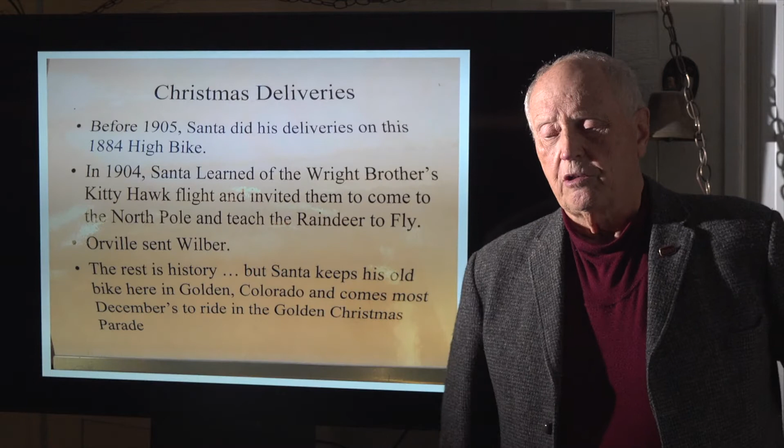First, here's Santa Claus. It's the season of Santa Claus, and he used to deliver his presents on that bike up until 1905. In 1904, he learned about the Wright brothers' flight at Kitty Hawk, and he wrote a letter and said, 'Hey, come up and teach my reindeer how to fly.' And so Orville sent Wilbur.

And there's the bike. Now what you don't see is he's got a sign on his chest: 'Please save my workshop floor from melting. It was 20 foot deep, thick, and now it's only 10 foot thick. My elves and all my tooling investments are at risk. Thank you, Santa Claus.' You notice there's a little bit of chauvinism in there. He didn't say anything about saving Mrs. Claus, but we got to forgive him. He was a well-intentioned dude.

Okay, so with him put away for the time being, personal climate responsibility. Many people have talked about the relevance of doing rather than just speaking. Nelson Mandela: you can never have an impact on the world if you have not changed yourself. Eleanor Roosevelt: one's philosophy is not best reflected in words, it is best reflected in the choices we make, which are our responsibility. Eldridge Cleaver in the 60s: you have to be part of the solution, else you are part of the problem. Mohandas Gandhi, also known as Mahatma Gandhi: be the change you wish to see in the world.

Paul Hawken, I really love this: do what needs to be done, don't stop to see if it's impossible until you're done. And then I like to say, there's no greater civil right than a right to a livable planet. And in the words of a poem by David Whyte, start close in. Do not do the second step, the third step, start with the first step. And I say, the first step is stop being the problem.

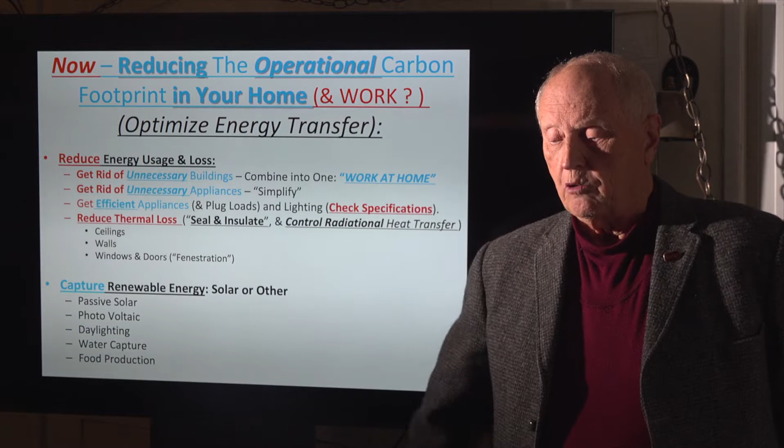Okay, so to reduce the carbon footprint, operational footprint in your home, and I put in parenthetically, and work, you need to reduce the energy loss and usage and capture renewable energy. As far as the first 2 points under the reduce, get rid of unnecessary buildings, whatever that means, and then get rid of unnecessary appliances, simplify, and then reduce thermal loss, then capture. I just want to say most of the talk is going to be on reducing the thermal loss with sealing and insulating and controlling radiational heat transfer in and out of the house.

So unnecessary buildings. I have a museum in my house, so my work is at home. And it's a gallery as well as a museum. Lots of funny old bikes, lots of funny old pictures of old bikes. I also, for appliances, got rid of the gas clothes dryer by having in this added space a passive solar walk-in clothes dryer. Now, there are tiers of energy activity.

Last week, you learned to calculate your carbon footprint. That's tier 0. Calculating didn't do anything to cut your carbon footprint. Tier 0.5, still not doing anything, is an energy audit. There are a lot of people that'll do an energy audit. Some of them will do a real good job and you'll learn a lot from them.

Some just go through the forms. Make sure you get a competent energy auditor and that they explain what they came up with.

There's tier 1, 2, and 3. Tier 1 is easy, you can do it yourself or contract it as a standard thing. So changing your light bulbs to LEDs if you haven't yet. Attic, seal and insulate - last week in the questions, the first question you gave me was what is the most important thing to do to a house, and I said attic. Next is lighter roof color, whenever you're going to do a new roof anyway because of hail. Most of us get our roofs done because of hail.

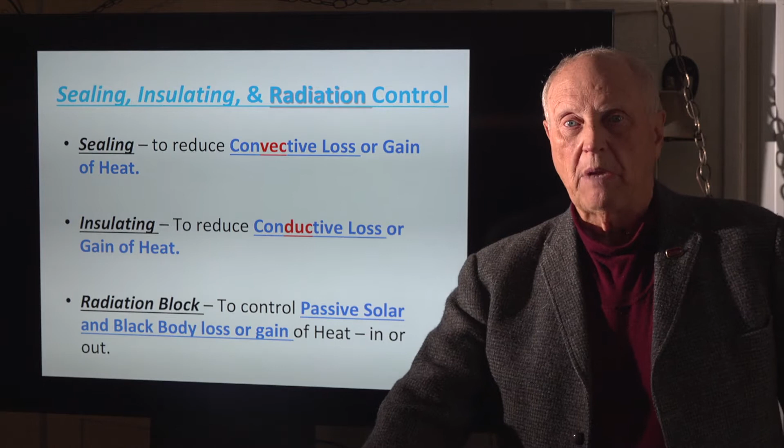And then the most aggressive is the building footprint, and you can add airlocks and make them just a single airlock to give you a buffer. So again, those are the easy ones - sealing, insulating, and radiation control. Sealing is to reduce convective loss. Insulating is to reduce conductive loss. And radiation block is to control the solar heat gain and black body loss of heat. Your body radiates out a window at a different frequency than the sun comes in. So there's coatings on the glass that can make it be a one-way stop or the other way or both.

Now, insulating values of materials per inch - this is for conduction. The red ones are typical wall and ceiling fills. Notice that poured concrete takes 12 inches to be R1. By the way, snow is R1 in 1 inch - wow, 12 inches of concrete equals snow. Wood chips is 1. Now aerated concrete is 1, where poured concrete takes 12 inches, this is only 1 inch.

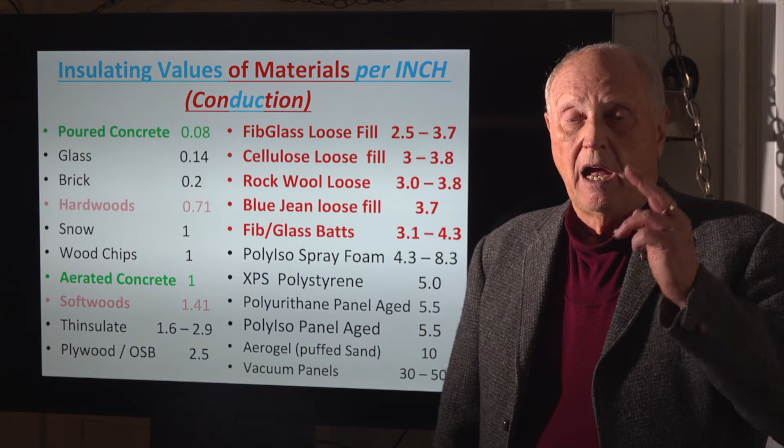Putting air in stops the conductive heat transfer. Another thing to notice, most of the framing is softwoods - notice it's 1.4 per inch, whereas hardwoods are 0.7. So a fir or redwood or pine is twice as insulating as hardwood. That's why framing is softwoods plus - softwoods are cheaper. It's interesting to note, thinsulate or down in a jacket is variably 1.6 to 2.9.

And then I'll just say all of the various foam panels are in the 4 to 7 range, up to 8. Aerogel, which is puffed silica or puffed sand, you can get 10, but it's hard to control and contain - it wants to go all over. And then vacuum panels - these are not used hardly at all. In Germany, they made some 12, 15 years ago, and they're fantastic, but they're not cheap. And as soon as you try to nail a picture up on the wall, no vacuum, and then they're back with poured concrete.

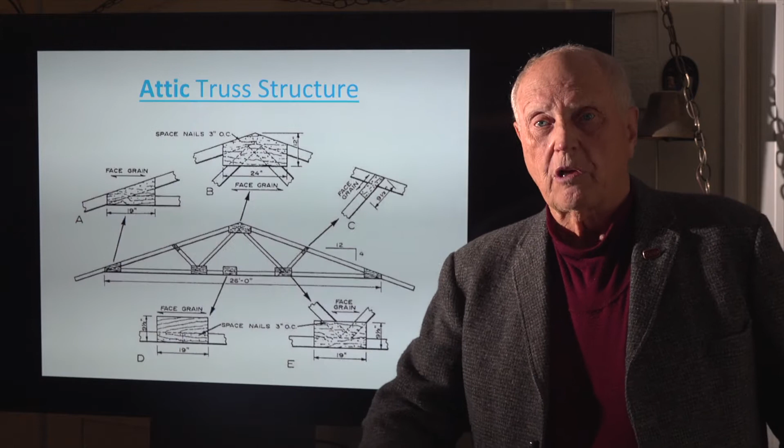Okay, attics and ceilings - this is the first thing you talked about, asking me a question last time. Here's a typical truss structure, very typical. There's other roof structures.

And infrared cameras. This one is a high quality one - this goes onto your cell phone, and this just gives you 1 pixel, just like when the nurse takes a temperature on your forehead. But the 1 pixel, if you move it around, it gives you a constructed mental picture.

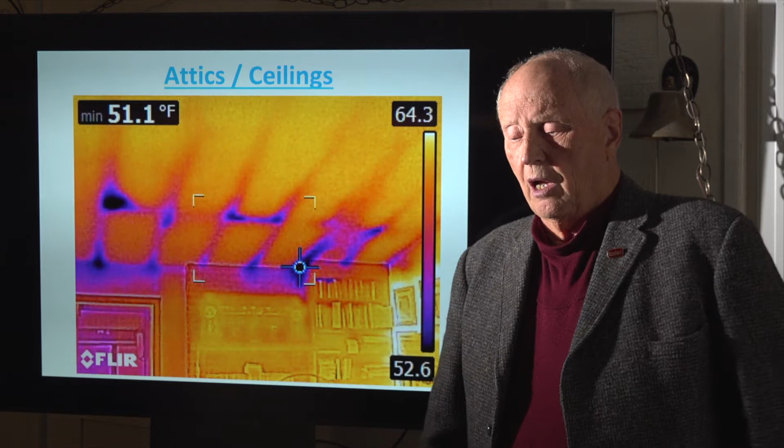Now, this is a ceiling, and you can see right along the top plate of the wall, and then where the truss supports come up, a lot of cold is coming down on a winter's day. And you go up in the attic and you crawl around and you blow stuff in. And this finished job is as high as shoulder length there, and so it's about R100, except over at the very edges.

But before you add insulation to an attic, you stop - which is for conductive losses - you stop and seal all the seams to stop convective loss, that's leaks. So you seal every place that the wallboard's coming up a wall and the wallboard's on the ceiling, you see the wooden top plate. You seal all of those with a foam - that's a 40-year or longer lasting foam.

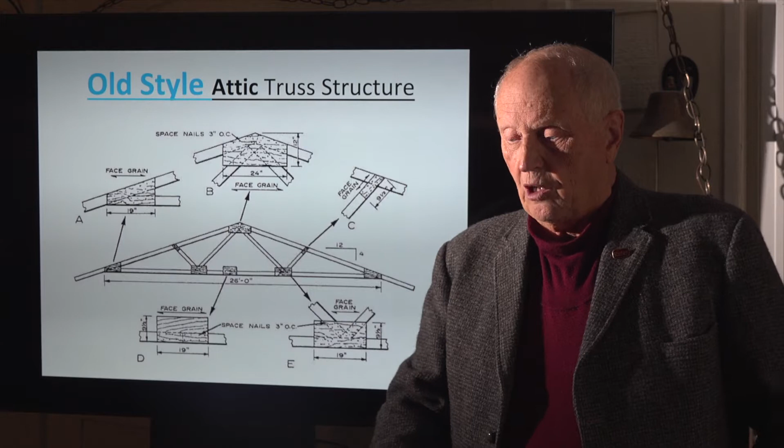So this is an old style truss, but there are new style trusses. What you notice here is a lot more at the edge and longer runs for heat to sneak out. You'll still get a little difference in your infrared, but it'll be much better.

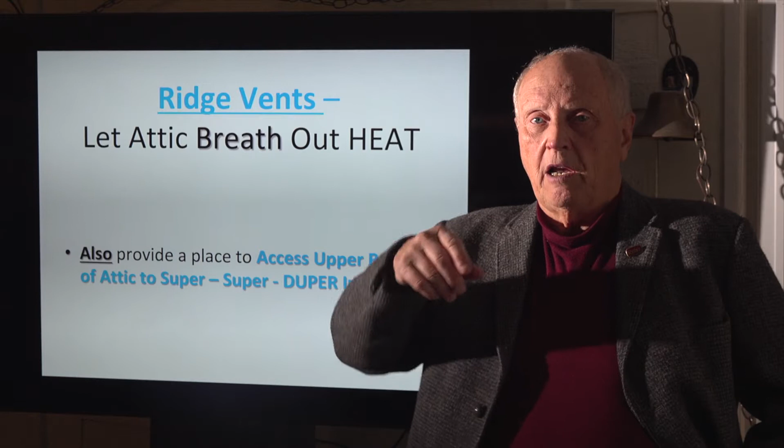Now, the ridge, the very top of your attic, lets the attic breathe out if you have vents up there. There's lots of ways of venting an attic, but if you let it go out from the sun at the tippy top, you get the best flow. And it provides room for somebody like Adam here from Bestway.

You can go beyond R100 and you can get it all the way filled up.

Now we're going to talk about walls. What are walls? Well, parts of the building perimeter or building envelope that have holes. Some standard holes and some non-standard holes. So doors, windows, and vents for ventilation are standard holes. Non-standard are electrical outlets, unless you go around and seal behind the plug, and cracks here and there, and gaps between doors and frames, and between windows and frames.

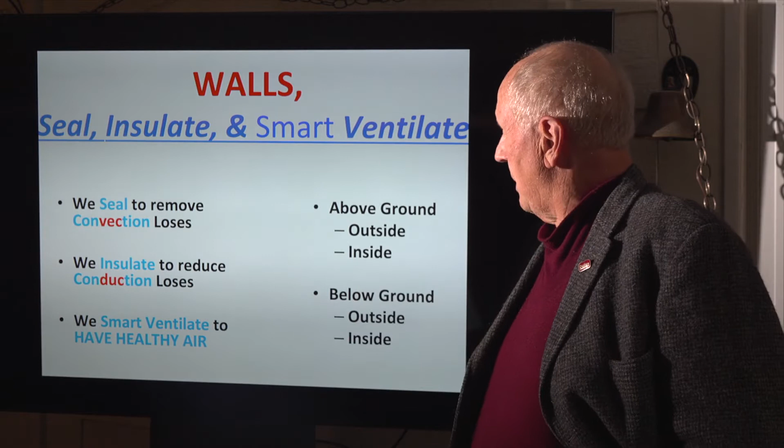So we want to seal, we want to insulate, and we want to smart ventilate. Opening a window ventilates, but we want to do it better than that because you lose the heat you put in, or the cool in the summer that you've put in. We want to do it above ground, outside and inside, below ground, outside and or inside, on each of these.

So house envelope walls can be frame, masonry, a structurally insulated panel - SIP panel, which are kind of nice and more expensive - or it can be a hybrid of frame with rigid insulation panels, or a hybrid of brick with rigid insulation panels. And the insulating values apply for the walls just like the ceilings.

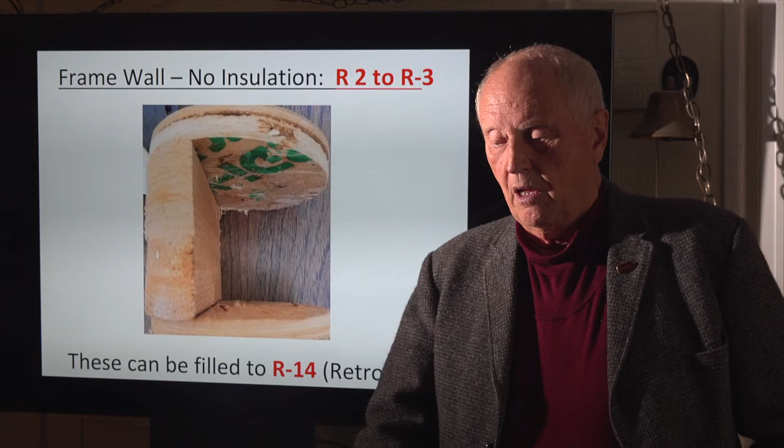Same thing. So let's take a core section of a wall, and you get this core sample. If there's no insulation, it's going to be R2 to R3. That's a low R value.

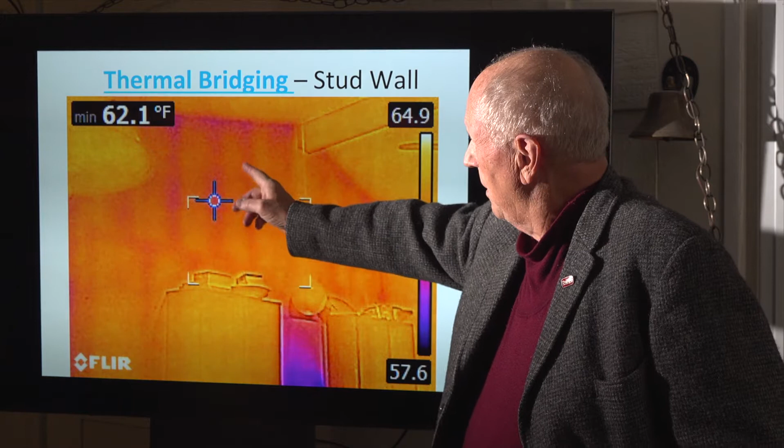If you have a fiberglass batt properly installed, it's R9 in a 2x4 wall. If you then tube fill with cellulose and press it in by doing a hole outside, you can get up to R14, so you can buy R5 addition. Now, you see on a wall the thermal bridging of where the 2x4s are - that's colder, that's warmer than that is.

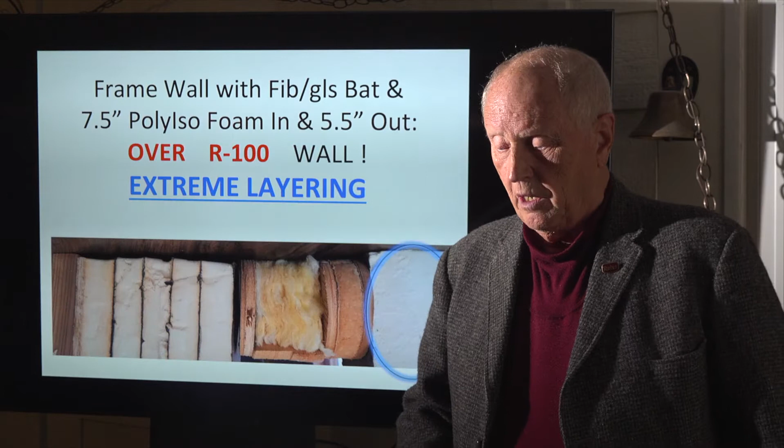And you can wrap with insulation, like this, which is polyiso. You can add more layers of that, and then put a layer that has a screw surface, and put your finish on that. And when you put your finish on, well, you can do it inside and outside.

So you can be really obsessive compulsive like I am.

You could also spray. Now, this seals real well. It is done commercially, but it's dangerous to apply, and there have been whole neighborhoods where it was applied, and later there were toxic emissions. So if you're going to go that way, it has to be well planned and well controlled.

Now we're going to look - there's a view from above at the top of my house, and you see the walls that I played with.

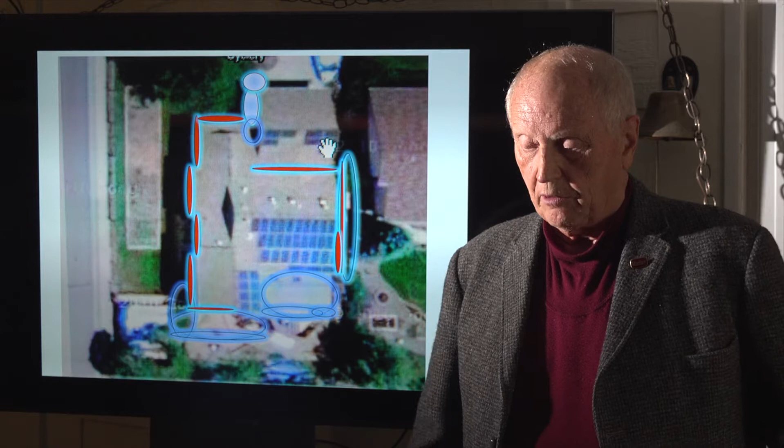And I'm going to take off my jacket because I'm getting warm. Seem to have a habit of doing that.

And we're going to start with the dining room wall on the inside, then we'll do the outside of dining room and kitchen.

So here you see 3 or 4 layers that are 1.5 inch thick of this polyisocyanurate foam, boxing first around with redwood onto the outlet and the heat duct, and then laying this up in layers, and then foaming to seal everything all around everywhere.

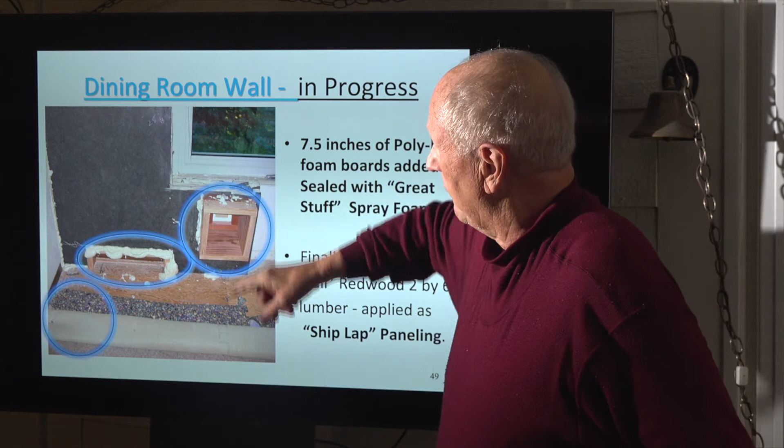And then after you get there's 4 layers of 1.5, then a layer that has the screw surface, and when you're done, right where that wall section and outlet and the heat duct are, you get a redwood wall.

This is redwood decking material that I've routed and made into a shiplap so it smoothly laps. And if you get redwood deck stuff that's cull, C-U-L-L, you get it for either 75 or 80% off at Lowe's, and you can make it be straight.

You can clean it up with a hand planer, you can route the edge, and it's great for a discount because people don't want to put crooked boards down.

And then when you put it up, you screw the bottom, screw the top, attach a block, a wedge, shove it over, and it's straight. It stays straight when you screw it. So this is that wall with the inside, with that much insulation.

Then I did the outside, and we're going to see that happen. Okay, here, that's garage, this is house. Cut right up through there.

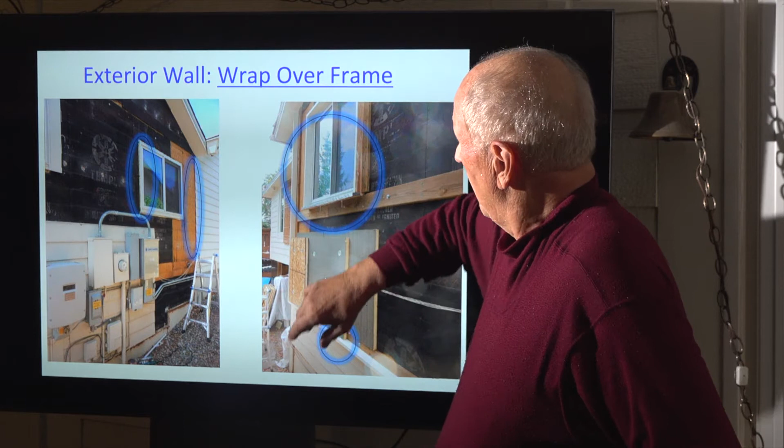I'm not going to cover up, I'm not going to lift all of that. So I cut and then did borders with 2x6 redwood, borders around windows, and then filled in.

And so there's a stack of material, and I happen to get that at a place called Extra Building Materials in Denver on the north side, just outside the city limits. Tax rate's only 5% out there. And this is stuff where the cut was slightly off spec or something, so it's greatly discounted.

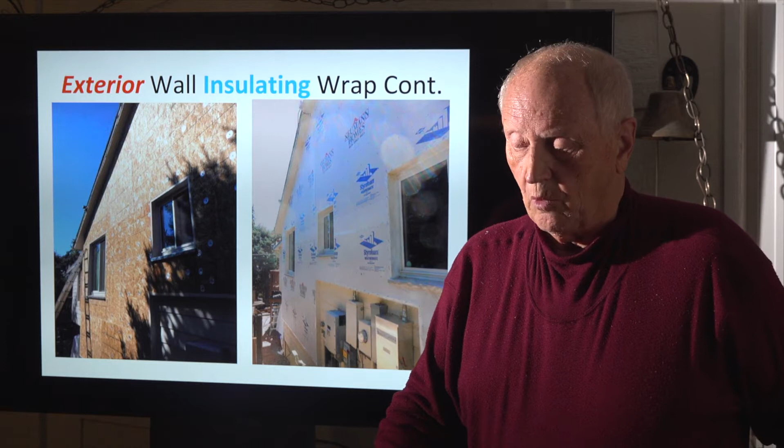And you have some paper tapers, but anyway, you build it all out, and then you put up your Tyvek or whatever material you want as a drain plane and air barrier. Vapor goes through, it's permeable to vapor, but not water.

And then all the siding that was on, I'd taken down, caulked all the holes, painted it 3 times with the top exterior paint, Valspar paint from Lowe's, and put it back up. So it's as good as new, or better than new.

Okay, so we've done that and that. I'm going to show this. Those are similar, but this is between the garage and the kitchen.

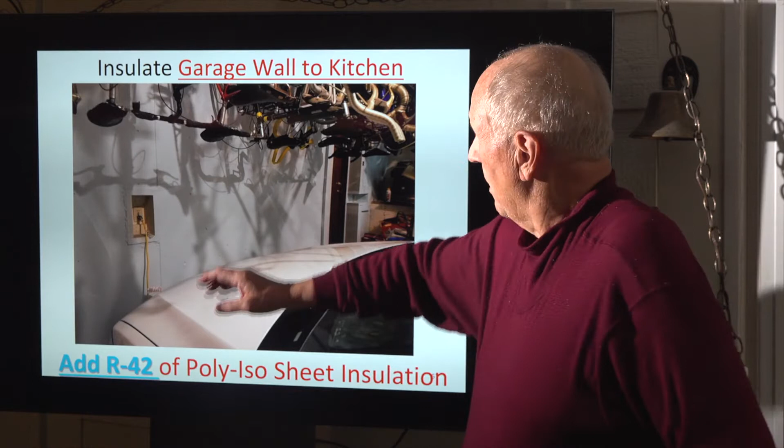Basically, I put up 6 inches of polyiso with 6 inch width of plywood after boxing around the door with 2x8 redwood and around the light switch and the outlet.

Now, the basement. You can do this from the outside and the inside if you have access to the inside. It takes a tarp, a shovel, a spade, and a yardstick. The yardstick's up here. The tarp goes down just so you don't mess up your lawn.

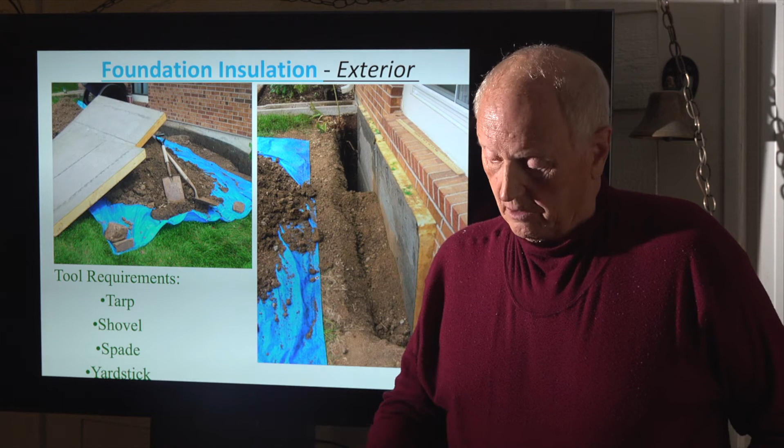And so there's the yardstick, spade. The spade kind of cuts, this kind of lifts, and you dump, and you measure until you're down. I did 4 feet. This is 4 inches thick. 4 inches gives you about R28, added to what was R1 concrete. So that's changing the basement quite a bit.

Now inside, quite often builders have done fiberglass with a plastic barrier. If you did an infrared on this, you'd see every place that the little nails were. It's cold as can be, but this is standard for a builder.

Now, one thing is, at the very top of that wall, there's an area called a rim joist. These are floor joists, and then a rim joist. And at that rim joist, the builder just shoved a little bit of fiberglass in.

And when he shoved the fiberglass in, he didn't really caulk to seal everything first. If there were plumbing lines going out for faucets, or a gas line coming in, or wiring going out to your circuit breaker box, they didn't seal it. So this fiberglass is very porous, and air goes right through it.

And so when you take these out, which are about an R8 or 9, you're going to see outside in a lot of places. So you want to caulk all of that first, and then cut pieces of the same polyiso and fit it in, then foam with Great Stuff around the edge.

I did 1 layer and then another layer, each 3 inches, to get 6 inches. At R7, that's R42, and it's all sealed. Really tightens up a house at the rim joist.

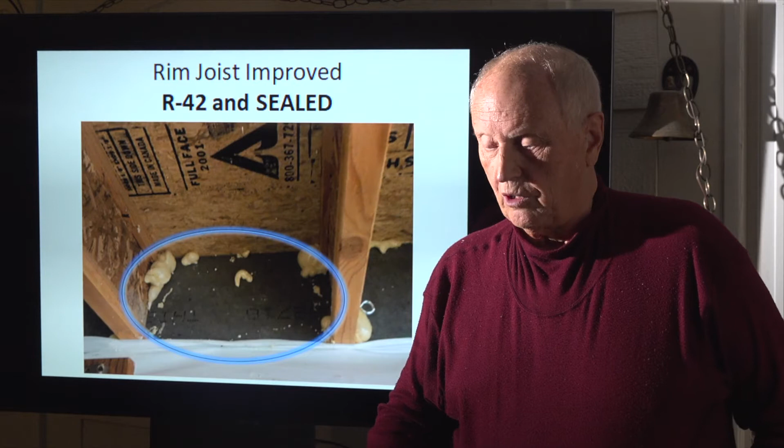Okay, another place it's a little bit of an oddball: wherever you have a bedroom sticking out, the builder probably didn't do anything.

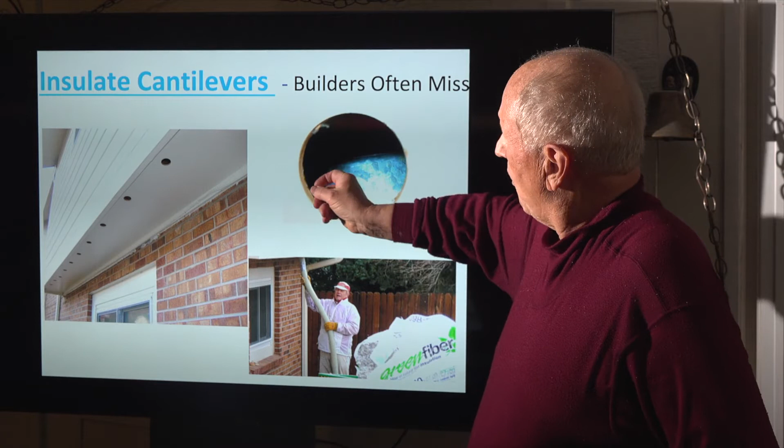So you drill one pilot hole, and the first time I didn't see this, but I saw that there's nothing up there, so I did all of it. This is a heating duct coming to the master bedroom, and it's just 1/4 inch plywood away from a -10-degree night. In other words, you don't get warm air into that bedroom. The furnace warms it up, but as it passes through there, it gets cold. So you blow cellulose in, that's about the easiest thing, and then you put a wood plug. You can get wood plugs that'll plug it up.

Okay, windows. Holes in the house for view, for daylight, for ventilation, and for sanity. I mean, sanity is a good reason. And they can be in walls, ceilings, and in floors. Hey, why not?

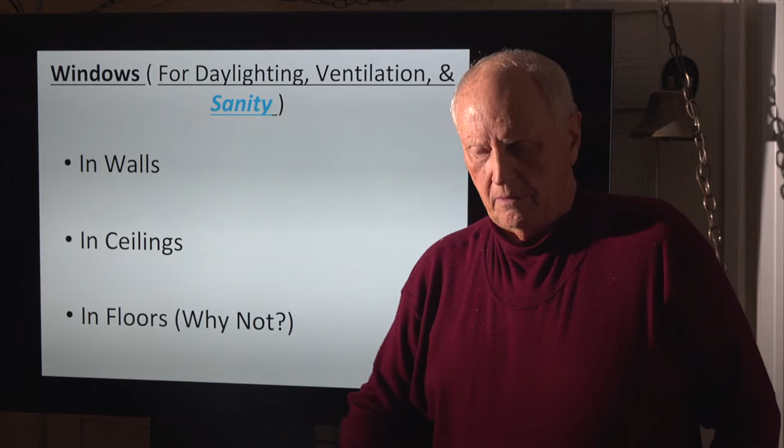So, a multitude of window types. You've got frames, glazing units, coatings on the glass, direction of exposure—whether it's north, south, east, or west makes a difference on how you select your glass—and layered with storm windows potentially.

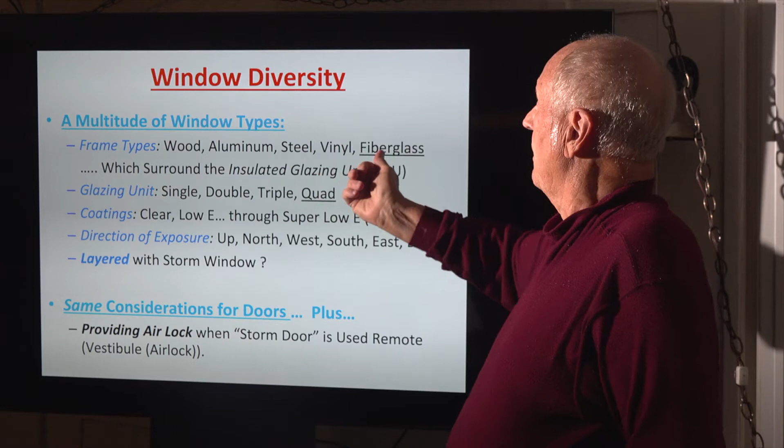So of the frame types, this will rot, these two are cold, that will deform on a hot day, and this does not. It doesn't deform, doesn't rot. It's not terribly cold if its frame is done in a way that has insulation inside.

The other good thing about fiberglass: there's something called the coefficient of linear expansion, and vinyl has a different coefficient of linear expansion than glass. So on a hot day, the glass wants to expand a little bit. The vinyl is different, and that puts forces in that may break the seal in your double or triple or quad glazed window, and then you get a foggy area. Fiberglass is glass, and glass is glass, so the two have the same coefficient of linear expansion, which means you have less problem with that.

Now, insulating value of windows. A single glaze, meaning one piece of glass, the stuff that was in houses in the 60s and 50s and 40s, 1960s and 50s, 1860s, 50s and 40s too, by the way, is about R1. Now what is the R value and U value? They rate windows by U value, which is the reciprocal of R value. So if you take 1 and divide by the U value, you get the R value.

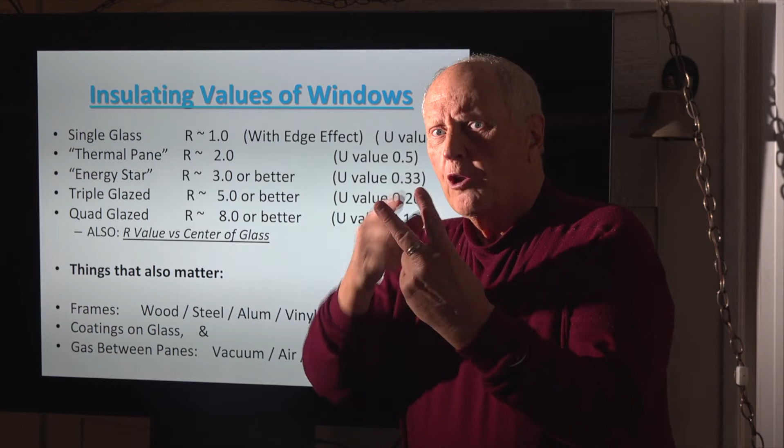So a thermal pane, two layers of glass, no special gases, no coatings, gets you about R2, which is a U value around 0.5. To be Energy Star, it's going to be about R3 or more, or a U value around 0.33 to 0.30. And that gets you Energy Star, which was set by the U.S. government a long, long time ago. Windows have gotten much better. The old ones that have either a coating or argon gas will give you an Energy Star rating. But you can get much better than that. A triple glazed with appropriate fillings will be R5, which is a U value of 0.2. And if you get a quad glaze made right up here in Boulder County in Superior, you can get R8 or better, so U value down to 0.125. This is for the glass unit, not the frame, and the frame is always worse than the glazing unit.

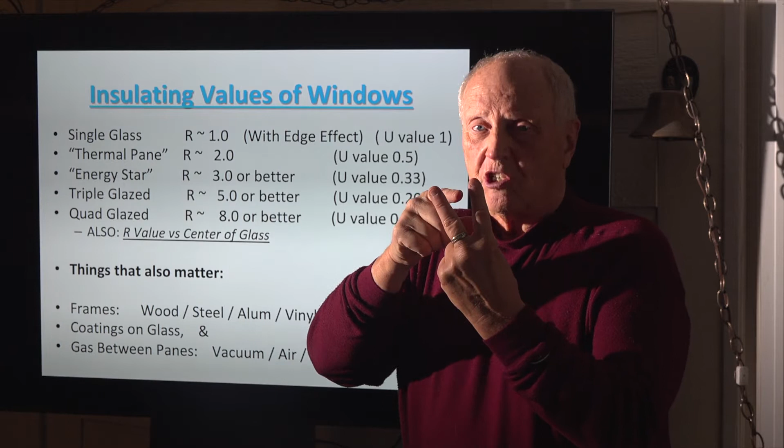Okay, so we talked about those things. Krypton is the best gas. Why is it the best gas? Well, if you have air in there between these two layers, and it's cold on this side and hot on that side, the air will get cold, drop down, then come up with the heat, and go around—so it's transmitting heat between the two layers. Argon is a little bit heavier, so it'll go slower and won't transmit as much. Krypton is still heavier, so it goes slower and doesn't carry that heat around as much.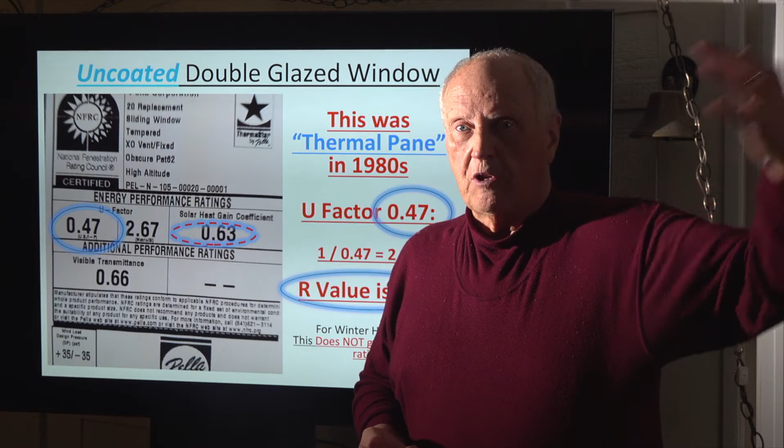It also tells you the solar heat gain coefficient, which is different. The U value is heat you're going to lose going out, and the solar heat gain factor is heat you're going to gain from the sun. Depending on what coatings you put on the glass, you can block the spectrum of one and let the other through, or block the spectrum of the other and let the one through. Then there's visual transmittance—did it dim the view? 0.66 is a good view, it's not dimmed very much. But this is the thermal pane of the 1980s.

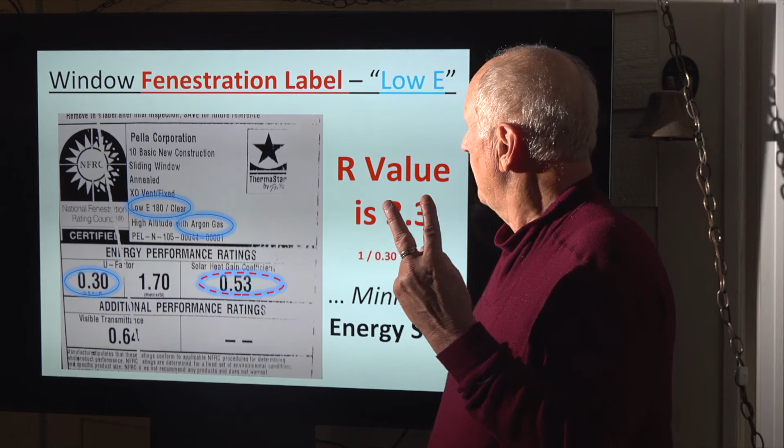Now this is Energy Star. What have they done? They've gotten one coating of E180 on one of the pieces of glass, and they have argon gas. That gets them down to a 0.30. That is minimally Energy Star. And the solar heat gain is a little bit down from a 0.6.

We're going to just see. Now this, 0.27, so we're up to an R of 3.7. And this also cut the solar heat gain a lot. So this is not what you want on a south side, where you want passive gain on a passive house.

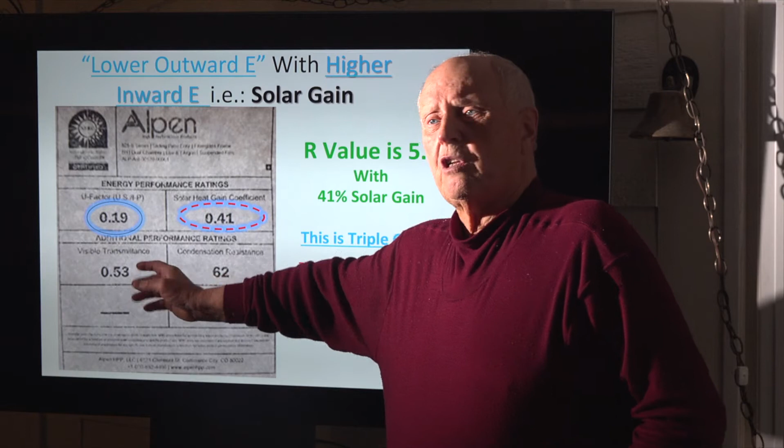But it's reasonably good for what you lose. Now this, we're down, hey, this is R5, 5.3. And this still gives you 0.41. This is great on a passive solar house, where you want to get the sun in the winter but not lose it in the winter. And it still gives you good visibility that doesn't look very darkened. They also sometimes throw in a condensation factor, how much you'll get around the edges from cold.

Now, I talked about windows having frames and then the glazing unit. This is from Alpen, right up in Superior, and it's got, this is the center of glass performance, a U-factor of 0.08. That says, for all except the 2-inch side edges of the glass, it's an R12.5. Wow, that's better than the houses of the 80s, 90s, even with fiberglass batt insulation and a wood frame wall.

And it has a solar heat gain of 0.46. This is fantastic if you want to get that low sun in the winter coming in, and you don't want the heat going out, the spectrum of black body. You don't want to get near it and feel how cold it's just sucking out of you.

Now, Alpen has their most recent low thing. They get down to 0.1 for the whole window, including the frame. And they also make it a little bit dark, so you're down to 0.3 on the vis.

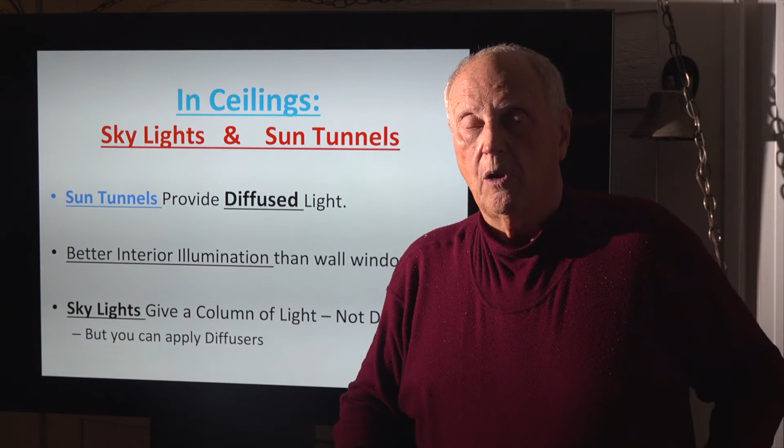Okay, windows can be in walls, they can be in ceilings - we call it a sun tunnel or skylight. Sun tunnels have diffusers that spread the light, which is far more effective than just a column of light like a skylight. This shows that a sun tunnel, even though it's triple glazed, is a little bit colder, but not terrible - everything's relative here. It's getting about 58 or 59 degrees when the room's at about 64 to 65. So it is cooler, but it gives you far more light than a window on the wall.

Now this is a window in the floor. In my house, one of the additions has a gymnasium, and below it is the greenhouse. I'm trying to bounce light into the back from the gymnasium, which is also catching a lot of light, so I have a window in the floor. You see a fan that goes around down there, actually blocking the banana tree, but the aloe vera is around the side. Okay, now doors for energy loss.

You can have conduction, just like a window, convection through leaks and gaskets and worn weather stripping, convection around the door frame from bad installation, and if you just leave it open, you have convection. And if it's got a pane of glass in it, you can have radiation going in or out, either solar or black body, giving you or taking away heat. So an airlock entry is better than storm doors because it tightens up the home - you close one door and then open the next. I talked about these a little bit before, and they give you spaces that are 3-season. We're in an airlock on my house right now, and this is December, and it's snowing a little bit outside.

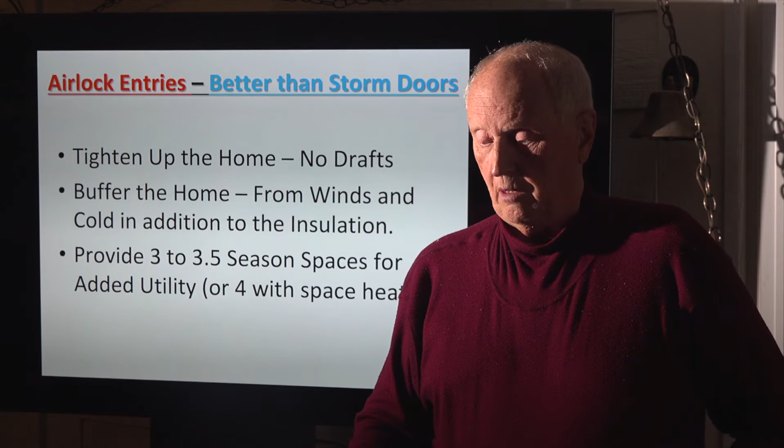Now, airlocks in corporate buildings - here you see the outer wall and the inner. You go through a lot of these things in the day if you're out and about. On a COVID day, you may not.

Okay, so my front airlock - I had a storm door and a portico. Well, I built up with polyiso, put on a door, and put bamboo on there, and got rid of that. That really warmed up the north side of my house. This is the front door on the north side of my house. It didn't make it quite as warm as I'd like it, so I still lost some heat out of 2 layers of doors in a 5x5 room.

So, hey, if 1 is good, 2 is better. So I made another outer front airlock and vestibule, and this looks like that. Some neighbors object, but most think it's not a bad idea. And so that's here.

So now we're going to do a little walk from the south. Right here is the living room. This is the conference room we're in right now, and this is the airlock.

We're going to go out and do a thermal scan, looking at the conference room. Actually, let me go back. This is looking at the original outside door. So it's 71 in the dining room and living room, and the door has its cool spots.

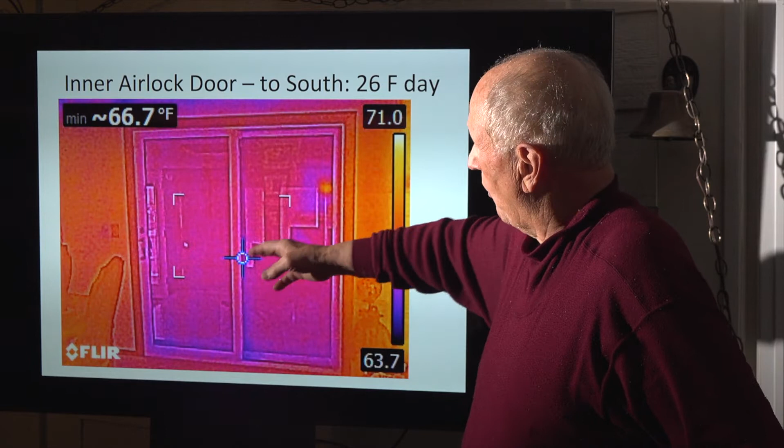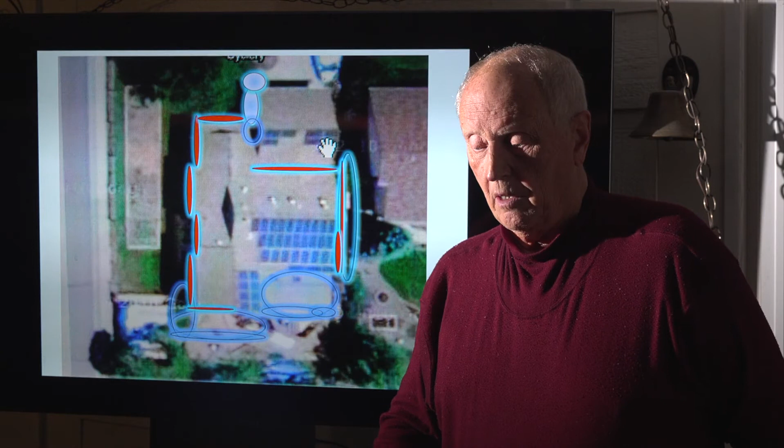So now we're going to talk about appliances and heating, ventilation, and air conditioning. There's a lot of topics here we'll go through. So refrigeration is the first one, and that fits under food preservation.

Historically they did drying, salting, pickling, smoking, curing, and then root cellars and ice boxes. When I was a kid we actually had a wooden box, insulated, and the iceman came and put a block of ice in -- that was an ice box. Then we got sophisticated and got a refrigerator, and then there's freezers.

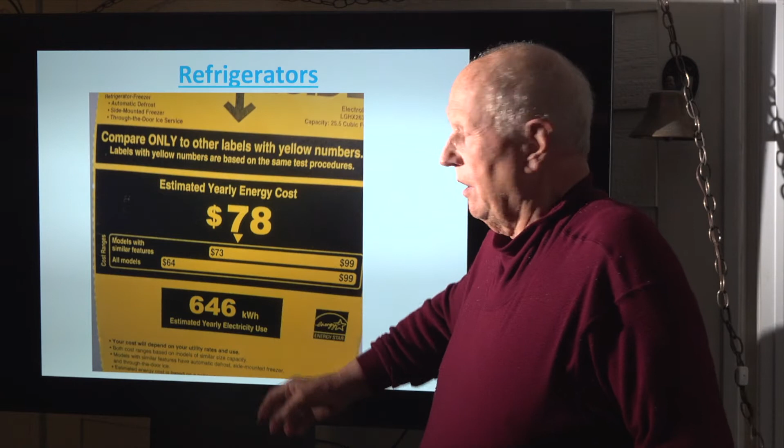On refrigerators, if you're buying one, study the specifications. This says this 25.5 cubic foot refrigerator freezer with water through the door has a cost of $73 to $99, and it'll use that much energy. There's lots of variations on refrigerators, but you want to be kind of low.

I did not buy this. This was at the store. I was just running around Lowe's taking pictures.

So refrigerators are heat pumps. What do they do? They move energy out of the box, and they use less energy moving it out than they moved, so they're productive in getting it out of the box. There are other heat pumps -- some that go one way, and some that can move it out or move it in.

Now, clothes dryers, historic evolution: a hot rock, a branch, a bush beside the stream, over furniture inside the home, or inside a car on a sunny day, or a gas clothes dryer.

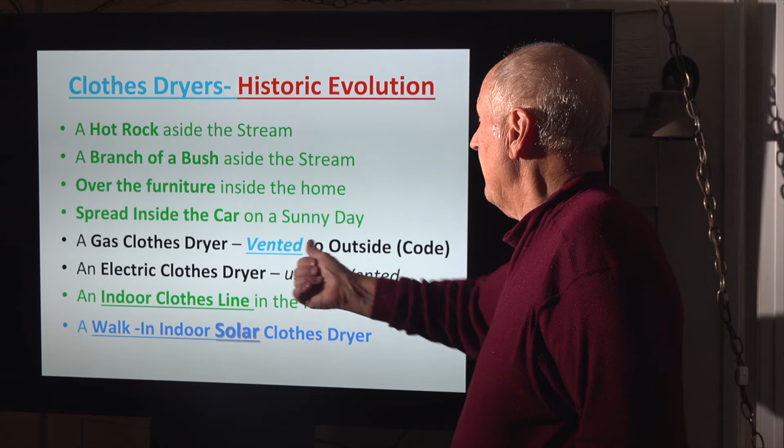Now, a gas clothes dryer puts CO2 in the air, and it has to be vented to the outside, because if it wasn't vented, the CO2 would go into the house and you'd get a CO2 buildup. You'd also get a CO buildup, because there's a little bit of byproduct that's carbon monoxide. Whereas an electric clothes dryer doesn't need to be vented, but it usually is. The gas clothes dryer, by code, has to be vented.

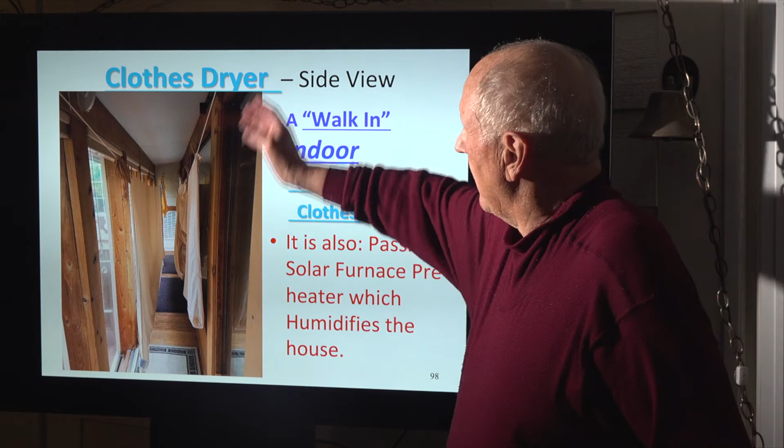And then there's an indoor clothesline in the kitchen, or an outdoor clothesline in the summer, or a walk-in solar clothes dryer -- and that's what I have here, basically two 20-foot clotheslines just between this conference room and the outside to the south. Quad glass and then double glass, and it's down the middle, and it looks like that with some sheets on it. So that gets rid of a gas clothes dryer, which I used to have.

Okay, water heating options. Lots of categories: you have an electric tank, a heat pump water heater, electric added to solar thermal -- these two are solar. Problem with solar thermal, you need backup, and the backup can be the heat pump, or it can be electric. So you have to pay for two systems, and the initial capital cost is high on those.

The bottom line: here's gas at the bare minimum inefficient one at 60%, or natural gas at 80%. And then this is the instant heat. The problem with those, they're expensive, and you get a potential demand charge because they're peaky, depending on how things are structured.

So of all of these, the heat pump is the cheapest on a monthly dollar basis. And it does not -- if you have solar on your roof -- have a carbon footprint. So there it is.

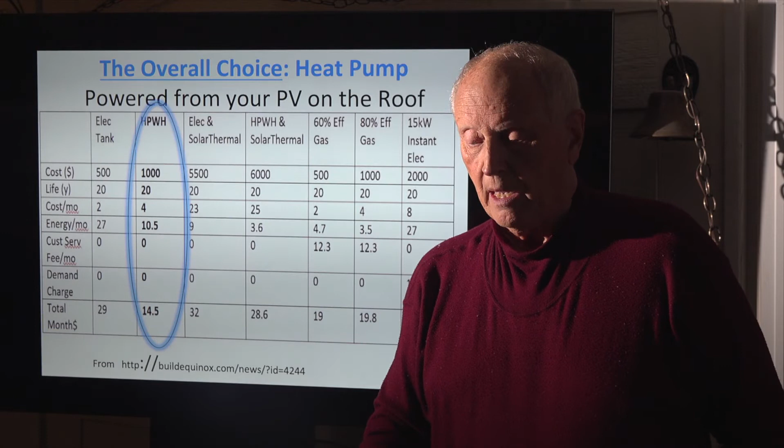Here's what it looks like, and notice the estimated yearly cost: 114. Now let's compare that -- propane, 630; electric, 555; a Rinnai, 175, unless you get hit by the demand charge, and then it goes dramatic.

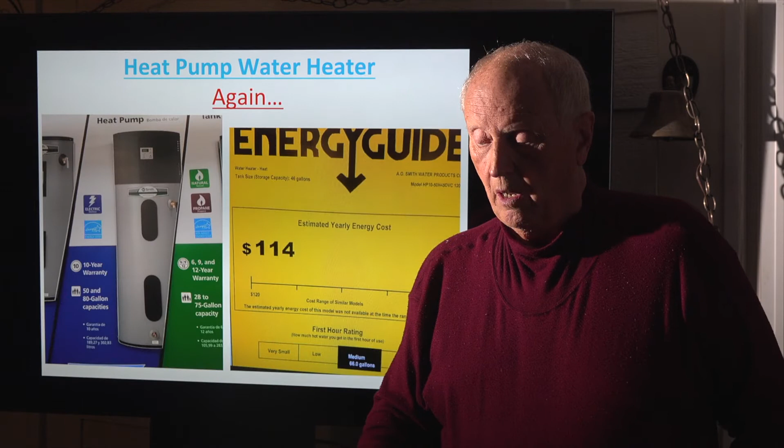And then a small gas, not a 50 or 80 gallon, but a 35 gallon. And then a full-size gas is 244, and that's a good one. So we come back again: the heat pump water heater is cheap in operation and therefore in carbon footprint. Cooking.

Okay, a lot of historic stuff. With a gas stove and oven, you get CO2 emissions and a little bit of CO emissions from the combustion. An electric stove top also produces CO2 emissions, but not inside the house - they're at the power plant when they're generating the power. An induction electric stove top and convection oven, if you have solar panels, produces no emissions.

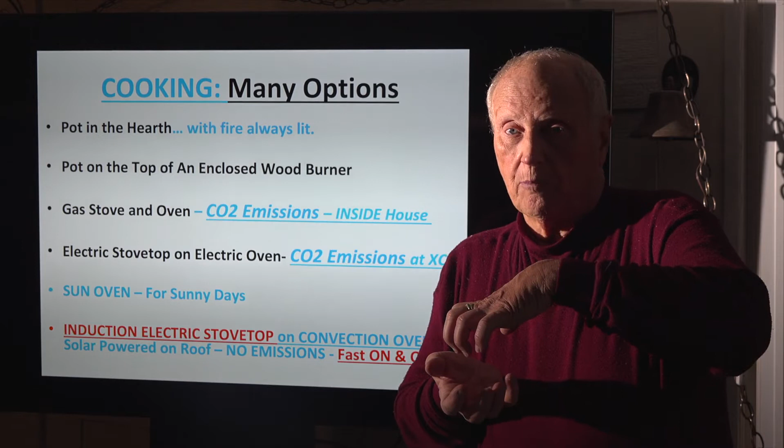A lot of people say they don't want electric stoves, but induction is faster on and off, which gets rid of the dislike of electric. When you turn this off, it's off. It's inducing a current and heat from the element below to the ferrous pan. It has to be iron - you can't use aluminum. So it's real good with iron pots, steel pots. You test your pots with a magnet - keep a magnet right on the side of the refrigerator, and if you have a pan, you go, oh yep, that'll work.

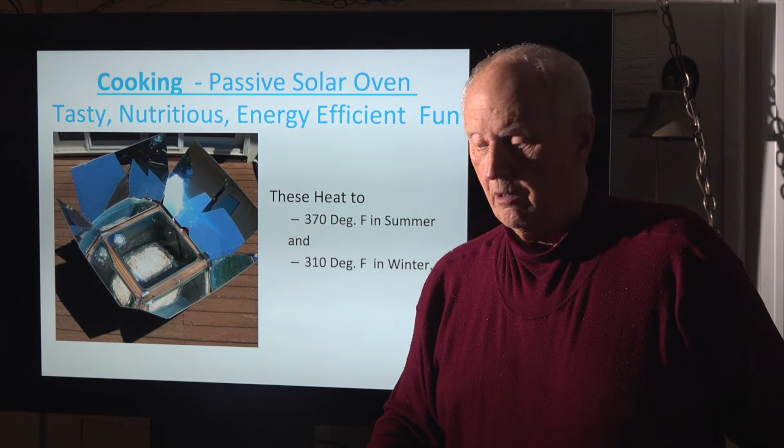Okay, sun oven - this works good on a sunny day, and it gives you a nice thing to be sitting on the driveway while people wonder what the heck you're doing. A sun stove is a little bit different - it's heating the bottom instead of an oven heating the surrounds, it's right on the bottom.

Okay, space heating - the historic view. Ancient is the sun or fire in the teepee, igloo, or mud hut. Now in Greece, in Rome, and in Navajo country, they had solar access laws - thou shalt not shade thy neighbor. We are not so civilized as those people, and so there's been efforts to get that kind of civilization back. Now farms had woodlots for fireplaces, coal furnaces and chimney sweeps, and then fuel oil and natural gas. And then we got fully carbonized, as are our skies.

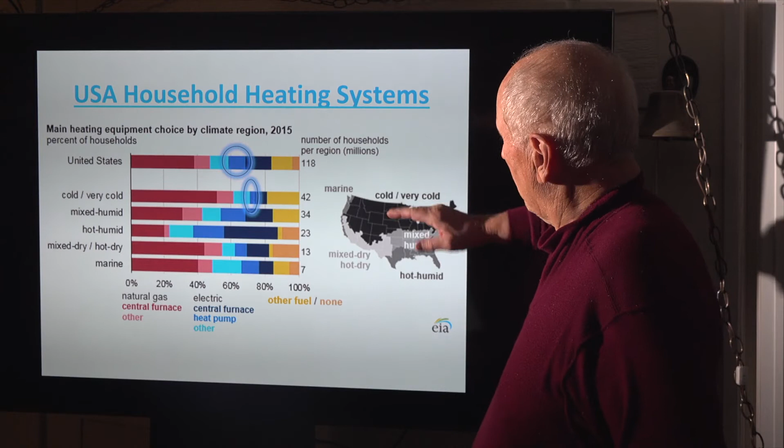In the U.S., if you look at cold, very cold, mixed humid, hot humid, mixed dry, and marine climates, mini splits are a very small part of most of these - especially in the cold, very cold regions. But they didn't used to be highly efficient. Now they're highly efficient, so with a well-insulated house you can use a mini split. What that is, is a refrigerator that'll run forward and backwards, and the box is your house.

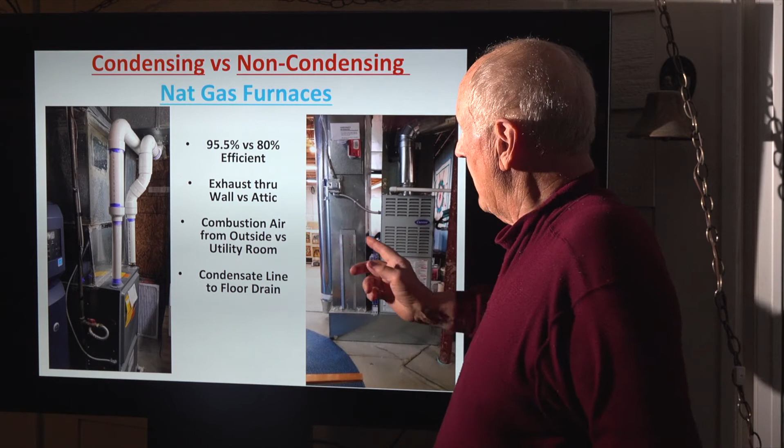So we don't have much in Colorado right now, but people are going that way because they are getting very, very efficient. Now this is a house up on Lookout Mountain - it's got 2 wood burners, and then this is 2 condensing and non-condensing furnaces. So these are about 80%, and these are 95 to 98 percent.

So you've got an outside unit, inside unit, and thermostat. So why heat pumps? Because they are moving heat, not creating heat. They are much more efficient than gas furnaces.

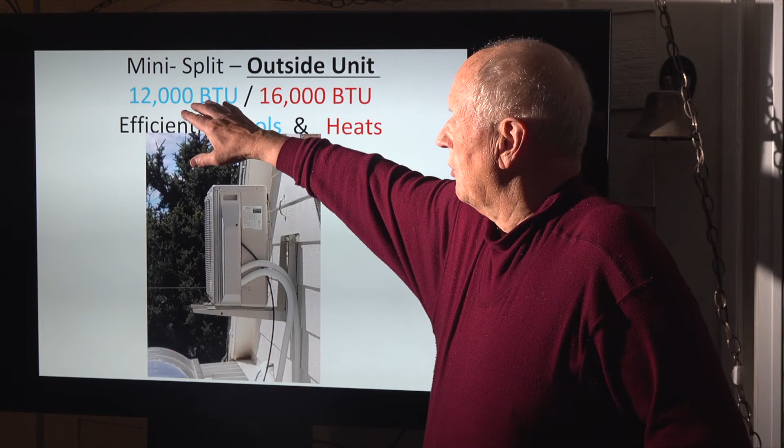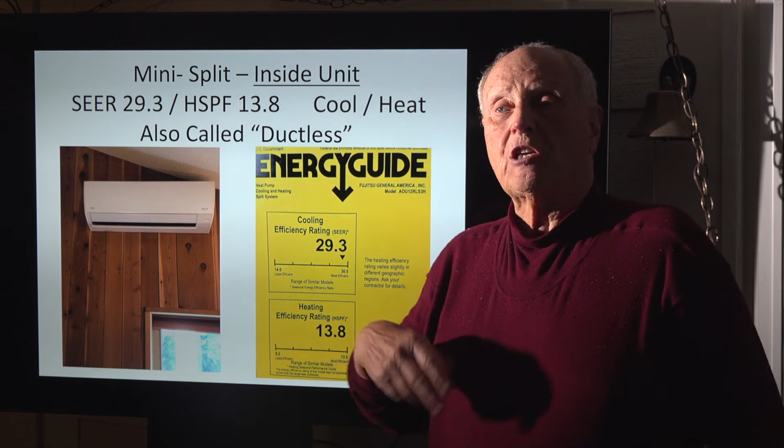So the outside unit - this is one that has a 1 ton or 12,000 BTU rating on the cooling, and a 16,000 BTU or 1 1/3 ton rating on the heating. And that's pretty good - here's its label. Of the range at the time that the energy guides were put together, 14 to 30.5, it's 29.3, so it's right at the top. And on the heating, the HSPF from 8.2 to 13.5 is there. So it exceeded the standard rating when it was done.

Now to do my basement, I decided I'd put another one right next to it, and they got better in the meantime. So that's a Carrier, and notice on a 14 to 30 rating, this is a 42. A 42 means it uses 1/3 as much electricity on cooling as some mini splits.

So you don't just go out and say, I want to buy a mini split. You say, I want to get one with a SEER value of 42. This is the only one, but it's new and it's good. And on heating, out of a top of 13, it's 15, so it's off the top on both. So here you're getting almost twice the heating value.

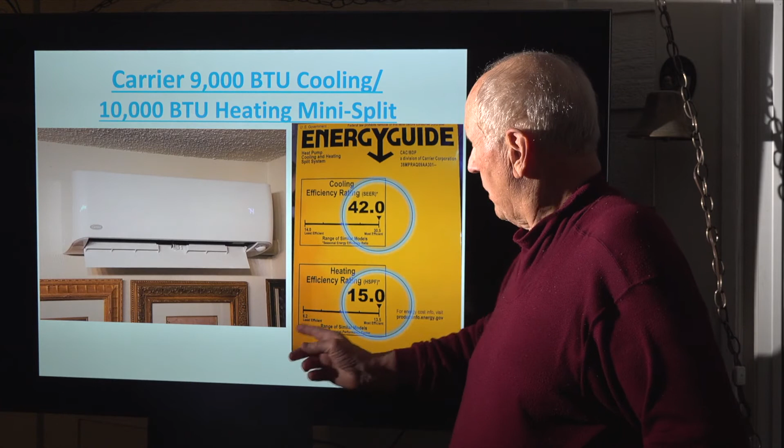It'll take and pull heat out of outside air that's at minus 22 degrees. It'll pull heat out productively and put that heat in, because it's moving heat in - just like a refrigerator is moving heat out, this heat pump is moving it in, unless you turn it around in summer, and then it's moving heat out.

Specs matter. I just want to emphasize, specs matter. If you just go out and buy something, it can be 3 times less efficient. So you really want to check the specs. The price of these is not enough more to matter when you consider the installation cost, because that dominates the price. So if you cut on price, that little bit of savings, you lose a lot.

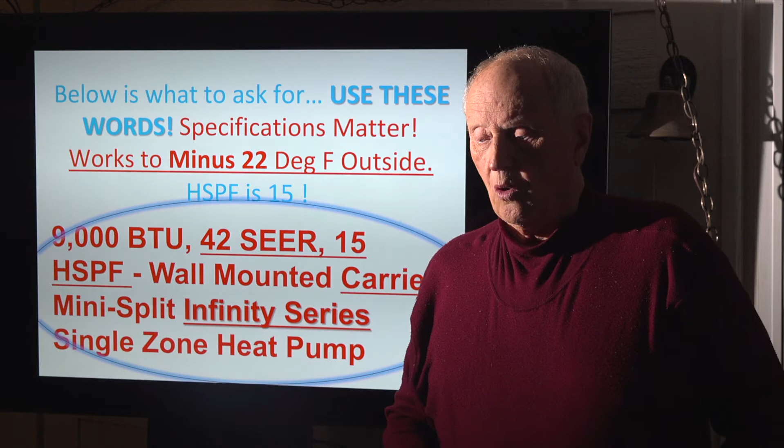So these are the words to use. I try to be strong on this. Use these words: specifications matter. 9,000 BTU, 42 SEER, 15 HSPF, wall-mounted, Carrier mini-split, Infinity Series, single-zone heat pump.

Now, you can get multi-zone heat pumps, and they will have 1 outside compressor, and 2 or 3 inside heads to give distribution. And they will be at the very low end on efficiency. And if one fails, you're dead in the water, you're cold. So if you get smaller units, no bigger than a 9,000 BTU, a 3/4 ton, you get smaller ones that are all super efficient. It'll cost you maybe a little bit more, but not much, to have 2 or 3 in different ends of the house.

Okay, other heating options: thermal, solar water, and storage. Some people have a lot of thermal stuff, and then they have a 10,000 gallon insulated tank in the house. In the summer, they're storing up all of the solar energy into it. And quite often they're running a little bit low come late February, and they're burning a lot more wood in their backup fireplace or in their electric adjunct heaters.

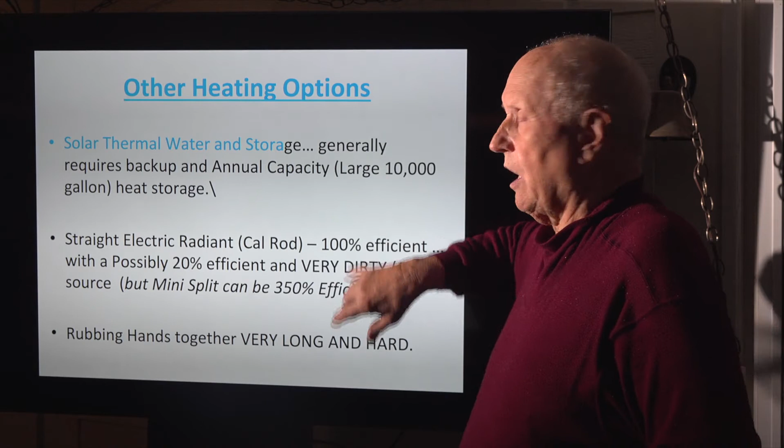And then a straight electric radiant with a cal rod is 100% efficient at taking that electricity. But the thing is, heat pumps can be 350% efficient. So 100% efficient is not the best you can do. It's kind of low.

Okay, air quality. I'm going to talk about COVID-19 air quality in your house. This is kind of new because COVID-19 is kind of new. So there's a new item from a company called Big Ass Fans. Now, if you've been to Costco, there's that big 24-foot fan in the ceiling - that's a Big Ass Fan. They make smaller Big Ass Fans too.

And so they do UV sanitizing of the air. You see a little blue halo - they've got UV light. And if you have it in the direction to pull air up and push air down, it's taking this sanitized air through, and it's supposed to be 99.x% cleaning by the UV of COVID. This company is really leading on efficiency of the fan motion and on putting in things like this. So I'm going to get one actually for my kitchen because I love that.

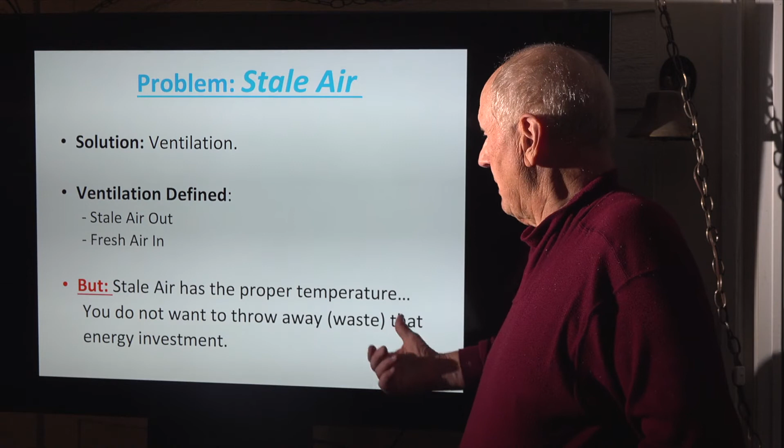So stale air has the proper temperature. You do not want to throw away or waste that energy investment. So there's heat recovery and energy recovery. Good in the eastern U.S., they move the moisture out - they don't save it. Whereas energy recovery takes the moisture and the heat and brings it around, by having a fiber energy exchanger.

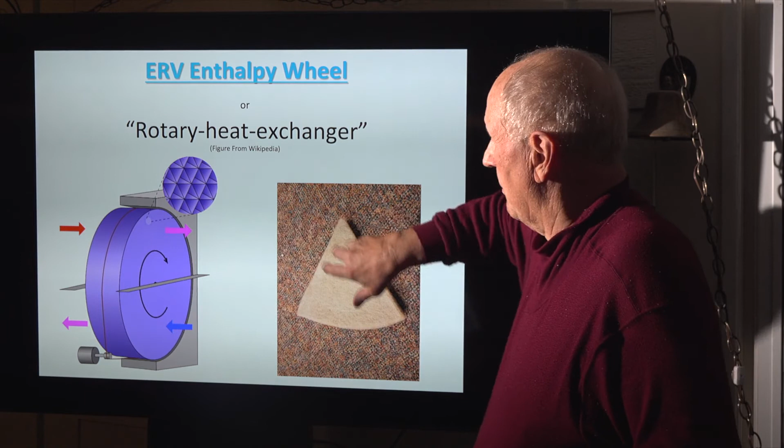Let me get to that. So here's the Wikipedia version, but this is actually one of the media pads, with 6 little pie pieces in there. So the air going out leaves heat or cool in it, and the new air coming in takes the heat or cool, but it also leaves moisture and picks the moisture up. There's 6 of these pies in there.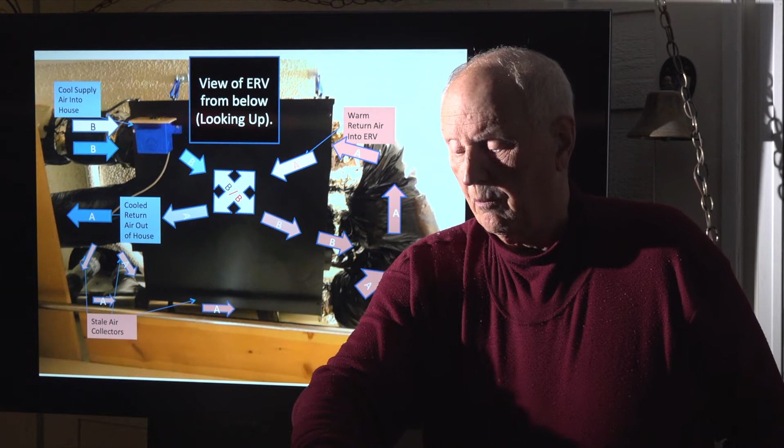Fresh air comes from outside, up high, away from exhaust, screened off and with a back flow damper. So here, up high, it's got a screen and a back flow damper, and it comes down and goes in. The dirty stuff comes out, and inside there are three dirty pipes that all come around and go out. Clean pipe comes in, and then it goes over to an extended plenum where the furnace was.

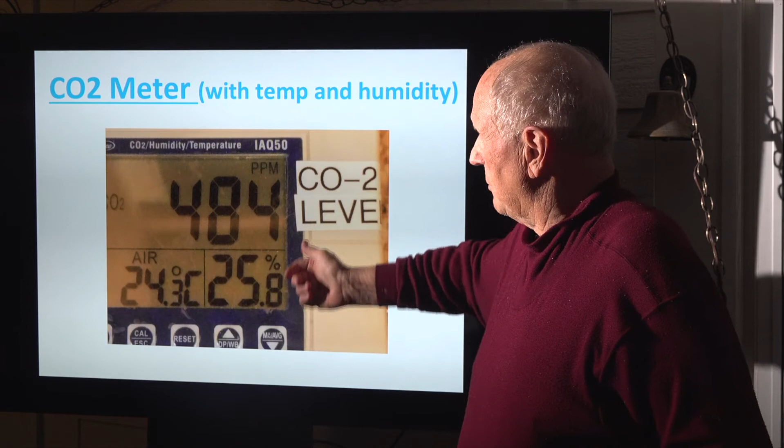What does this do for you? Well, if you have a constantly running CO2 meter, which is not a bad idea, you can see the outside level is about 415 to 420 now, used to be 280, 150 years ago. So you've got your CO2 level, and these meters also generally tell you your relative humidity and temperature, and VOCs - they're down, this is 13.3 parts per million, very low, so you're in the green.

So now we get to renewables. A lot of people for a lot of years have been looking down at the earth saying there must be a source of energy down there, and they've come up with lots of science to find out if there's something down there they could burn one way or another - was it solid burnable, is it peat moss, is it coal, is it oil, is it gas?

But they were getting a sunburn on the back of the head while they were doing that - so you need to look up, you fool. I mean, people go to extremes. Now there's good, and there's maybe overkill on this.

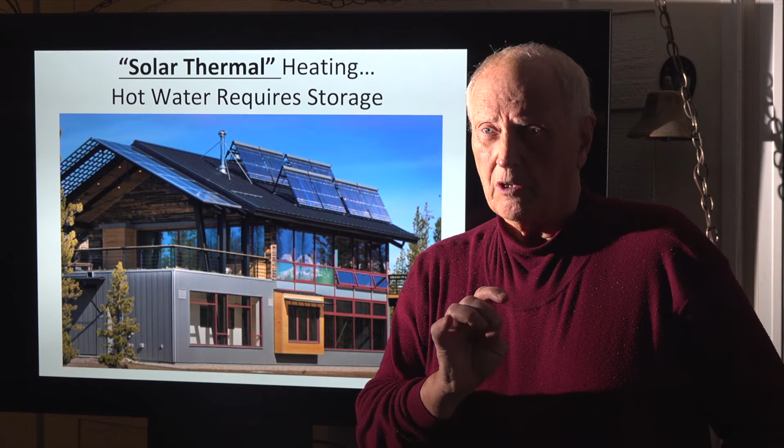So here you've got solar hot water panels, solar PV panels, passive solar without any shading, a little bit of overhang on some of that passive solar, and passive solar without any shading. There's an awful lot of it - here you've got passive solar on this and on that, but not on that. In the middle of summer, that's bearing in, and that's bearing in.

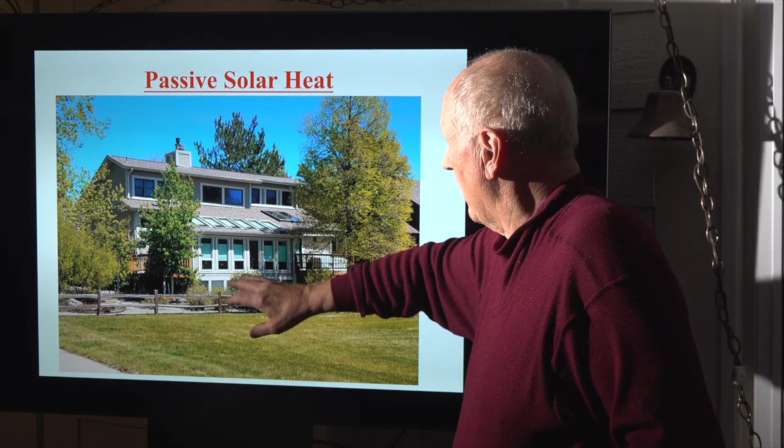And so the shades are down, and then this - you've got passive solar, and you've got to have shades and a little bit of overhang, but it can work. Whereas the shading, the overhang, is good for those. Talking to people in one of these houses, they said, 'Oh God, they get way too hot,' and they don't have venting to dump it out the top - that's the problem.

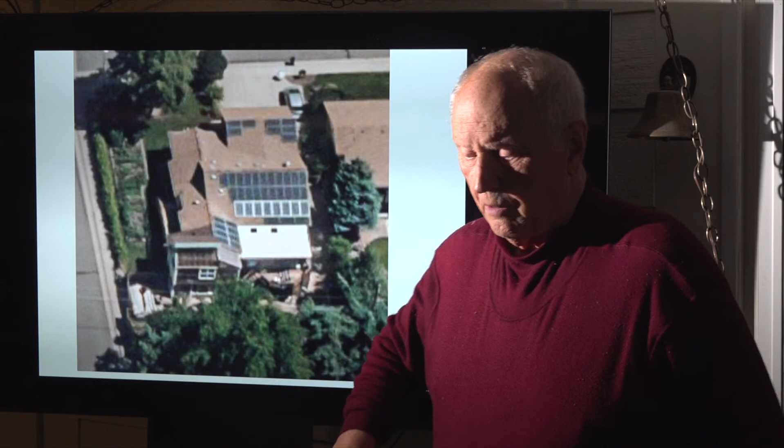So again, look at all this - boom, so all shaded, and that's the good natural shading, but it can be excessive. So in doing mine, I did some weird things. The room we're in now has a white roof and an overhang, so in the summer I get almost no sun. Then I built this, and I get it there and there, even in the summer, a little bit reduced there. But in the summer I actually pull a lot of that heat and duct it through to the north end of the house.

But here's what that looks like - I have a vent there, a vent there, a vent there, and a vent around there, and I can open these. This has a see-through wall on the outside and the next. So with these open, I can bypass all the heat and go out through those. I can collect heat or bypass heat, and the collected heat I ship north - this is the south side.

So now I just had to throw this in because it's something I newly saw - I don't know if you've ever seen a solar cow, but there's a PV panel in it, and here's the cow's mouth. In African schools, so the kids have light to study at night, they have these battery systems and flashlights - they put them in in the morning, and when they go home they get them out and have the flashlight at home. I just love this, it's just neat as can be. It's a Guernsey - I think that's what the black and whites are, Guernseys.

Okay, I'm going to go back to a little bit of moral words. Eldridge Cleaver, I said it before - you either have to be part of the solution or part of the problem, you'll be. George Bernard Shaw: people who say it cannot be done should not interrupt those that are doing it.

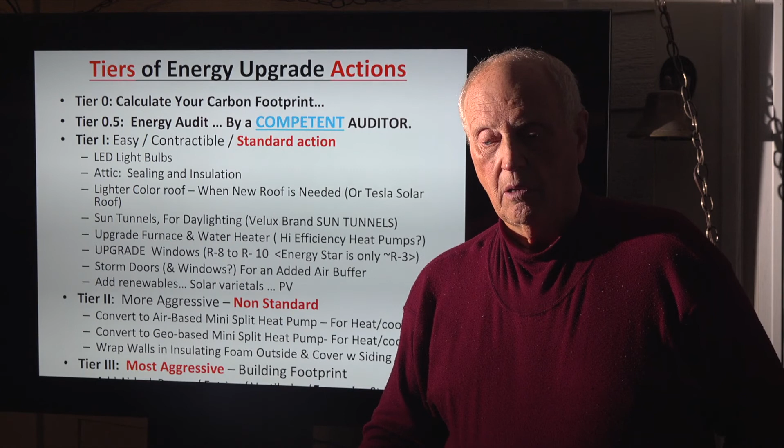This guy's an advocate, and I think he's done a lot of personal work before he became one. I was lucky enough to be at an event with him, and my good friend Martin, who's also the videographer today, shot that picture of me without me knowing and gave it to me - being next to Bill, who started 350.org.

So now I'm going to quickly talk about what people usually ask me after a talk: what is your ROI? Like, this is a business, you've got to have a return on investment - if you don't have one, you shouldn't be doing this stupid stuff. Well, I do give the financials, but the bottom line is I got grandkids - there's no other ROI. But it's good ROI anyway, financially, if you're a cheap dude like me.

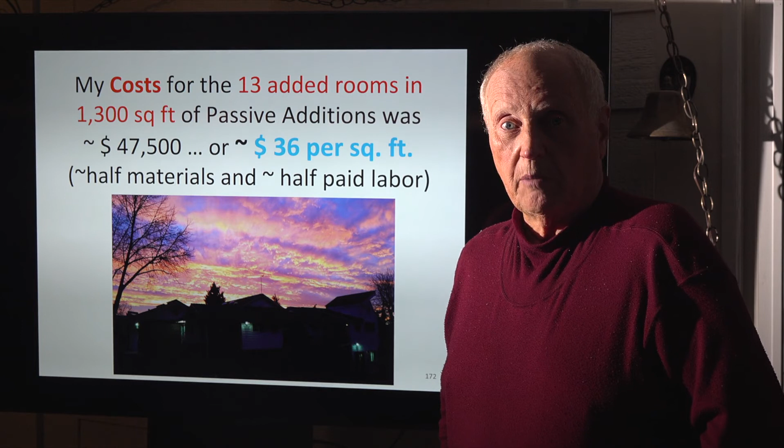Other costs over 17 years: altogether $69,000, so that's about $4,000 a year. Actually, would you mind going back to the slide with the insulation cost? I think that's interesting. Okay - now I've done this over 17 years, and prices change.

Insulation: I did the attic myself, doing it once, then doing it again and adding more, which got harder because I should have done more the first time. I spent $5,800 when I finally had a guy come out and do the ridge - I was taking off the ridge vents, he was blowing it in, and I was putting them back on with him. That was Adam from Best Way up in Lafayette. Then I had the basement walls done by a different contractor before I found Adam, and they blew fiberglass between the inner fake wall and the outer wall since it had already been finished down there.

Inside, on the main floor - trying to remember what that was, sorry - but the garage ceiling, I went up and added bales to get it up to R-38. And then outside, east side, I did $1,800, and that was the building-out that you saw.

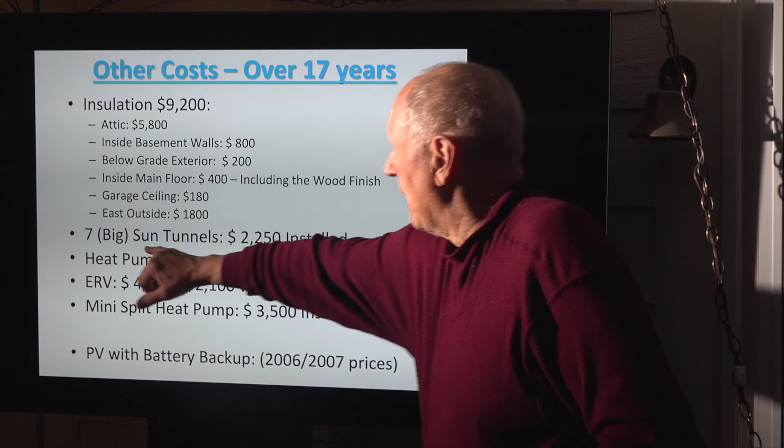Heat pump water heater, 1,800. An ERV, the labor separate - I did not install the energy recovery ventilator. I bought it separate and had a guy install it.

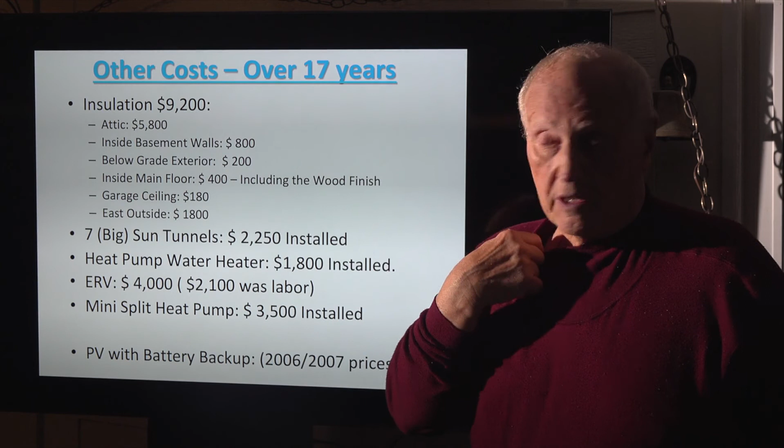And then mini split heat pump, 3,500. Now this was - I've since done another, so this is not totally up to date because I've had another couple years in the game. And then my PV, I'm not including that. It was at prices way back when. Prices are actually better now, even though the rebates are less.

So the total, that's to get beyond net zero, that's plus PV. And to get beyond comfort, getting 1,300 square feet, now it's 1,400 with the latest room. Comfort beyond belief, and transport fuel and home fuel saved, and a lot of food.

I can go down right now and pick mandarin oranges and navel oranges and kumquats on the trees. They're not big trees, it's not big crops.

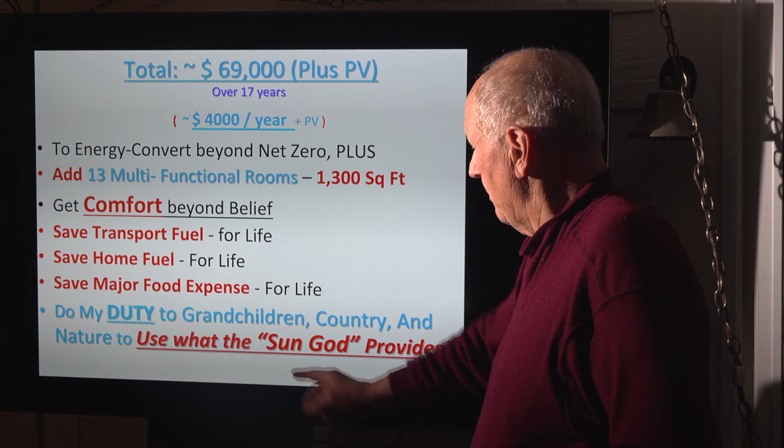And I do my duty to my grandchildren, country, and nature using what the sun god provides. Lots of different gods around.

Now, 4,000 a year - what could I have used 4,000 a year for? Well, if I got 2 packs of cigarettes a day, it'd be 4,000. If I had 1 cocktail at a decent bar a day in LA, it'd be 4,300. If I did a trifecta of 2 Starbucks grande lattes and a 7-day Vail lift ticket, but slept in the back of the car, and a 7-day tour pack in Vegas, that would add up to be $4,000.

So any one of these things, by doing it the cheap way I do it, would add up to that. So I didn't need to give up all that, but I gave it all up.

So do people ask about ROI on smoking or drinking or playing golf or going to Vegas? Do they ask about your ROI? Why not? If they're going to ask me about my ROI on doing what's right and good for the kids and good for the climate and good for everything, why don't they ask all these others?

So, since I don't use tobacco, caffeine, alcohol, drugs, or ski, gamble, or play golf - some of these are worse sins than others - but I only needed one of these for doing all the upgrades. The other two...

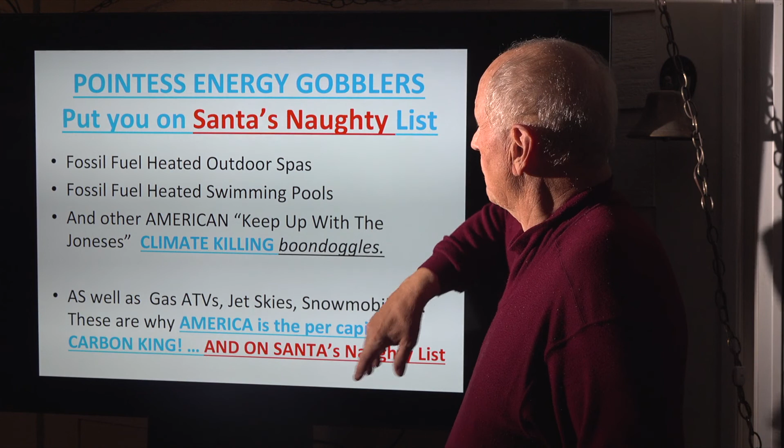So now I'm just going to talk about some others. You can be on Santa's naughty list. We're back to Santa. You can be on Santa's naughty list if you have fossil fuel heated outdoor spas, fossil fuel heated swimming pools, and other American keep-up-with-the-Joneses climate killing boondoggles. Sorry if I've offended anybody, but not so sorry. As well as gas all-terrain vehicles, jet skis, snowmobiles. These are why America is the per capita carbon king and on Santa's naughty list.

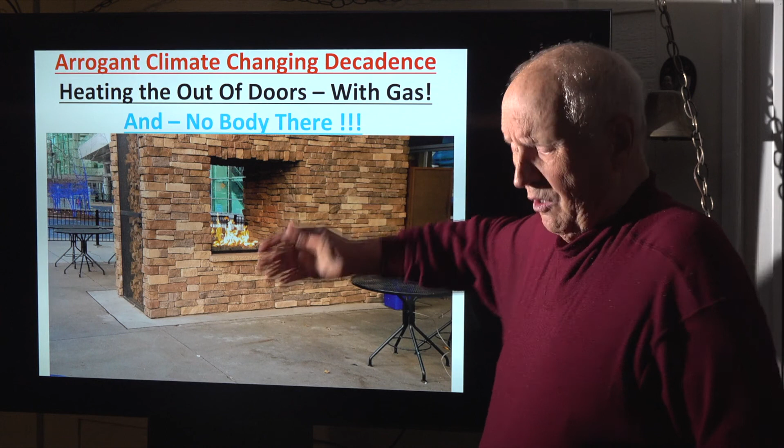By the way, right down by the Colorado Convention Center, there is this at an outdoor restaurant, and they keep that running through the winter. And that's just burning methane, putting out CO2, and nobody there. I mean, what kind of image? A lot of people say, oh, isn't that nice? No, that's not nice. It is not nice.

Santa says, ho, no, no, no, no, ho.

So, thank you, and we'll talk a little bit now about what activities are done and what numbers you got when you did your carbon footprint, if you did it. Actually, my assignment for you going forward is go through the tier 0, 0.5, and then start working through tier 1 with LED light bulbs, and then think about your attic - sealing it and insulating up to a very high level. I did a middle-high, then a higher, then a highest. It's better to do it all at once instead of in stages. Thank you.